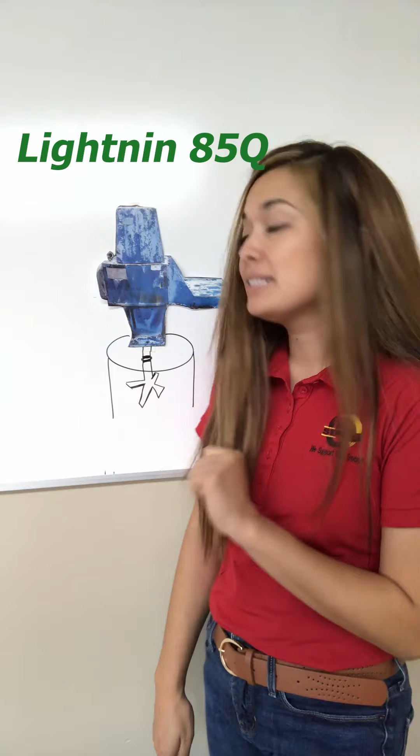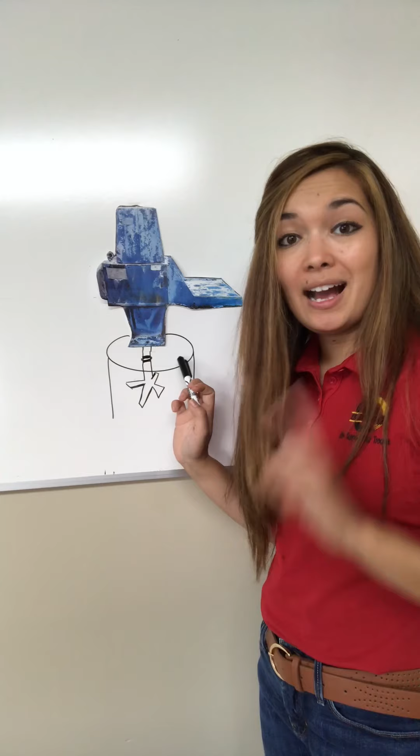Let's go to the drawing board. This is a basic mixer drive setup, using a real Lightnin 85Q gearbox as an example. The gearbox sits on top of a tank and is coupled to an agitator that spins and mixes everything below. This agitator has to accommodate high thrust and high bending moments, which means the bearings also have to accommodate those loads.

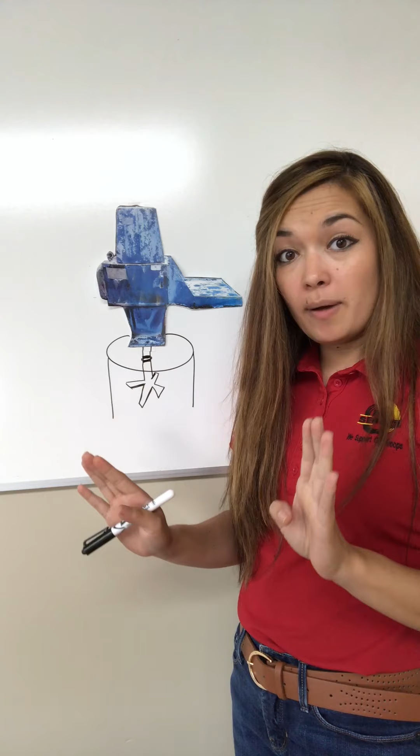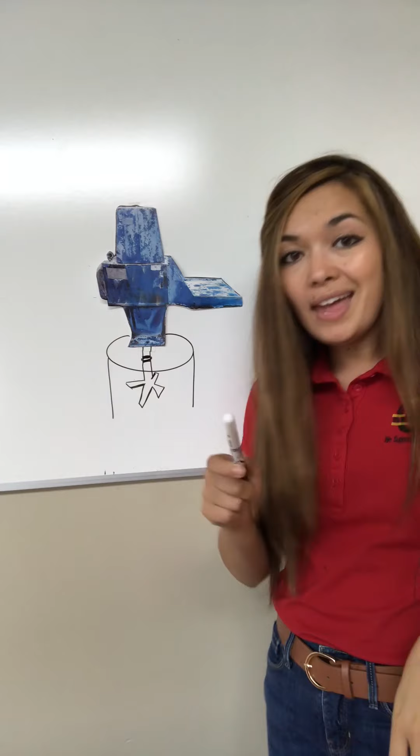So let's talk about when these gearboxes fail. Say a seal up here breaks—guess what you have to do? You have to take the whole gearbox out. You have to lift up the agitator blade and support it on top of the tank. Then you also have to worry about whether your product will spoil from not being mixed, or whether you'll lose a tank because the spoiled product never got mixed properly.

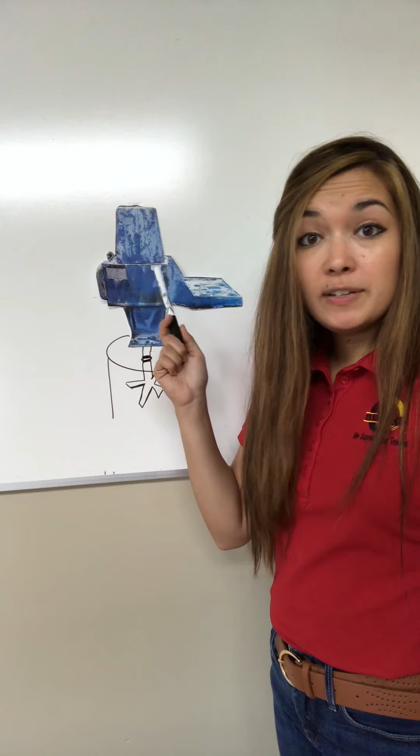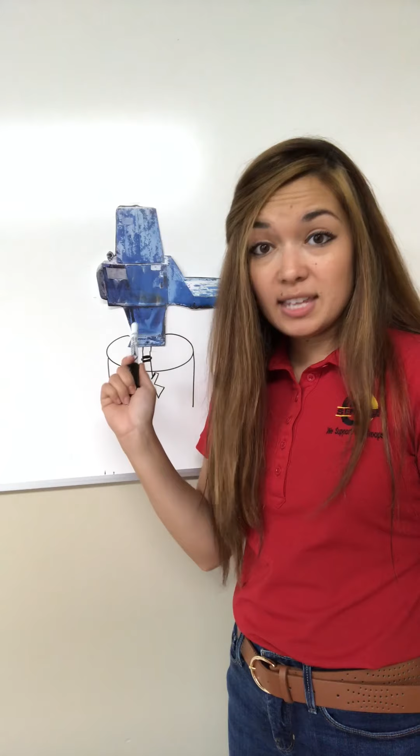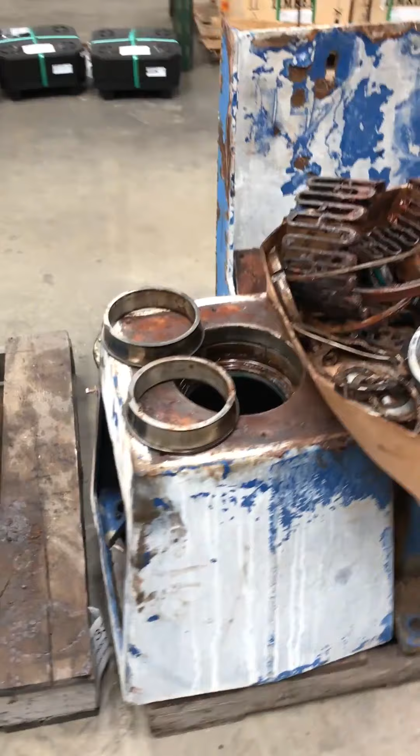So if a seal goes out, you have to take the gearbox out. If a bearing fails, you have to take the gearbox out. This requires a lot of downtime because you have to hire a crew to lift the gearbox off, hoist up the agitator, and tear down into the gearbox. This video shows all the components required for this gearbox—it takes a lot of man hours to disassemble, look through all the components, and figure out the root cause of failure.

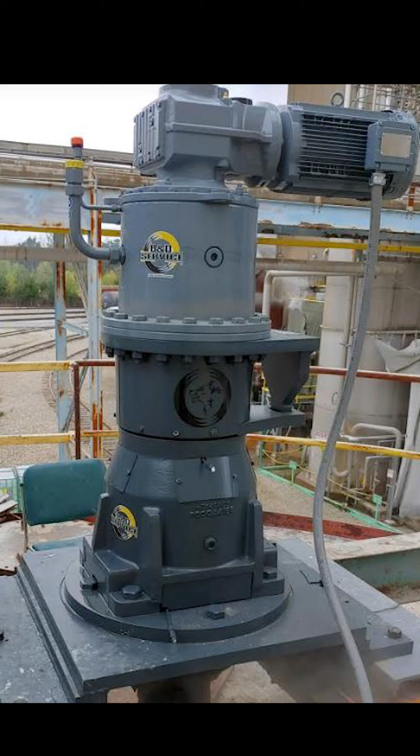In situations like this, when you cannot afford costly downtime, we have a solution for you. And here's how we did it—ta-da! We have a Wolf Drive. We've taken what was a complicated situation and condensed it into a simple and effective solution. A Wolf Drive consists of three major components: the motor, the input gearbox, and the Wolf housing.

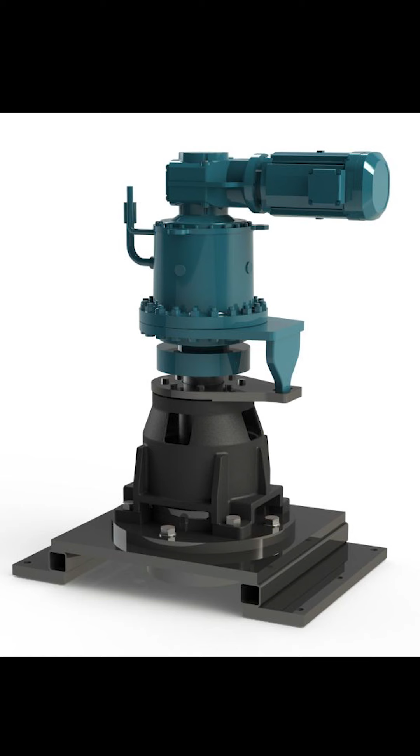There are two categories of housings for the Wolf Drive: steel and ductile iron casting. The vertical markets we're trying to reach are pulp and paper, mining, water waste treatment, and chemicals. Our Wolf Drive is application specific. We're targeting folks with mixer drives ranging from less than 1 RPM up to 250 RPM. Generally, these drives will cover most mixers.

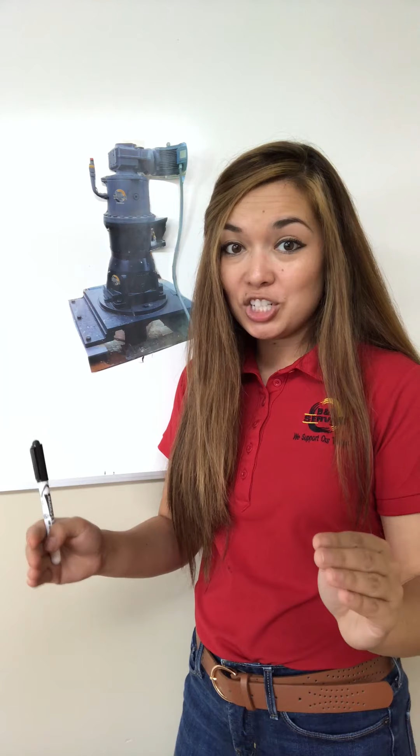The L10 bearing life is 20 years of service life, and that's crazy. This means you can put this big boy into your application and not have to worry about the housing for a very long time. Components may fail here and there, but where they're going to fail is inside this gearbox.

So why do you need the Wolf Drive at your mill? Number one, it's simple—simplicity, folks, simplicity. In a normal mixer situation, you have to disassemble everything. With a Wolf Drive, whenever something goes bad, all you have to do is remove the motor, change out the gearbox with a spare, put it back on, and you're running in no time. Your downtime is minimized—this thing is basically indestructible.

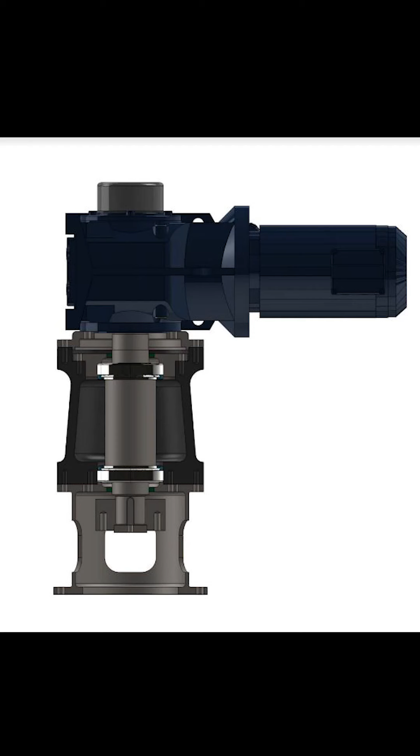What I want to stress is that it's robust. Hashtag robust—it's robust. The Wolf Drive has two bearings rated for 20 times what they normally are in a mixer drive. It is a robust design.

The second benefit of the Wolf Drive is flexibility. We can incorporate any gearbox that you need or desire into the design. The components above and below change based on your application. We select the gearbox, we size the application, and our BDSC OEM gearbox has a warranty for the design.

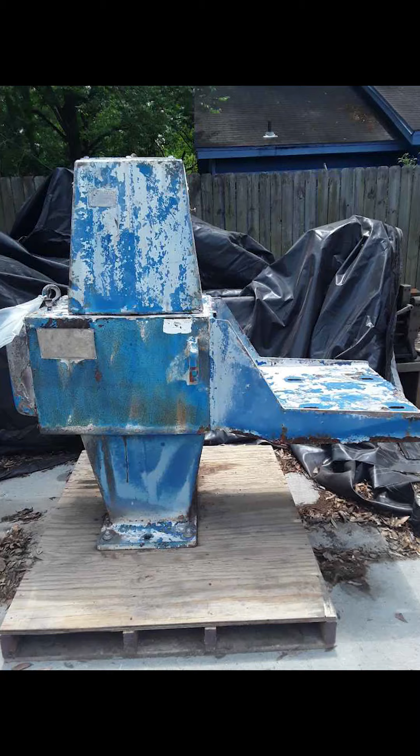Let's talk about costs. I'd like to discuss cost of ownership and what this means for you. As a customer, you have two options to consider. Your current setup has the initial cost of a gearbox, the cost of a spare gearbox, and what it costs to replace or repair that gearbox in the field when failure happens. The other alternative is the Wolf Drive setup, where you only have to worry about the input gearbox and its spare. In our earlier example with the Lightnin 85Q, a complete new unit runs in the $50,000 to $55,000 range.

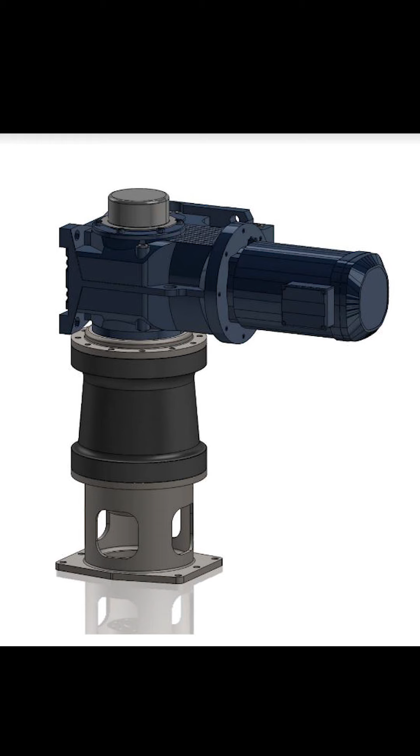A complete repair of that Lightnin unit would run around $35,000, not including the cost to remove or reinstall. A new Wolf Drive unit is in the $43,000 to $45,000 range, and we can put on a new input unit and motor for $13,600. You lift it off, put a whole new gearbox on, and the Wolf housing is never disturbed—your downtime is minimal.

The additional cost is reflected upfront because the gearbox has been over-designed, but in the long term, your ownership cost is minimal since you only have to change out the economical input gearbox, and the change-out time is minimal. You put in something you know will be reliable, that will get the job done, and gives you the ability to confidently walk away to something else.

Now that you know about our product, the Wolf Drive, I hope you're hungry for a more reliable solution to your mixer applications. Contact us today to get more information about how this Wolf Drive can benefit you and your reliability needs.